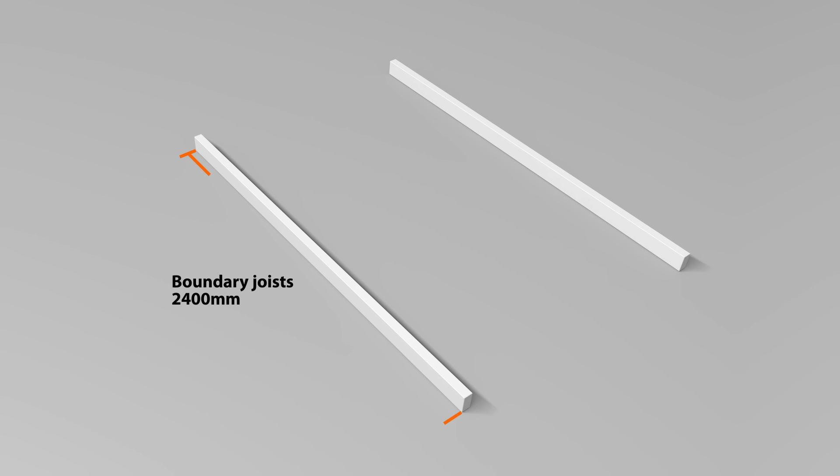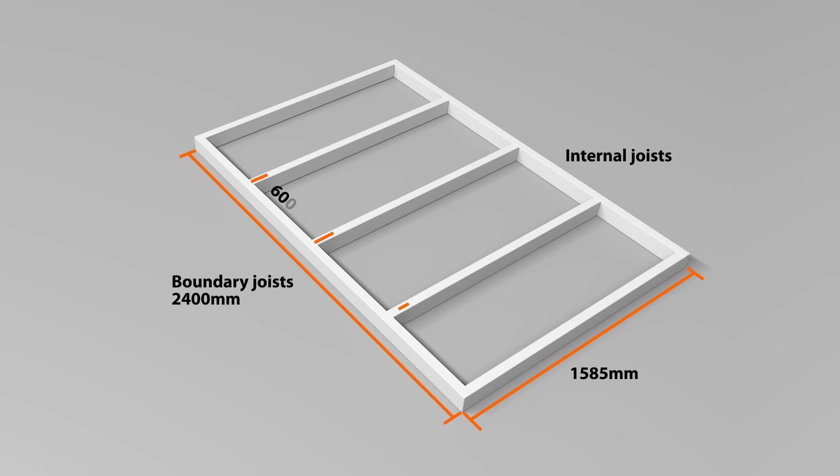I'll need 2 boundary joists at 2.4 metres and the overall width of my floor is 1585. Yours may be slightly different depending on the widths of your floorboards. My internal joist will sit between the boundary joists and I'll have 5 of them at 600mm centres. I'll start by cutting my boundary joist to length.

Okay, so I've just got my 2 outside rails clamped together. Now what I'm going to do is start marking these out for 600 centres for our joists to go in between. So we're going to go 600mm to the centre of our joists.

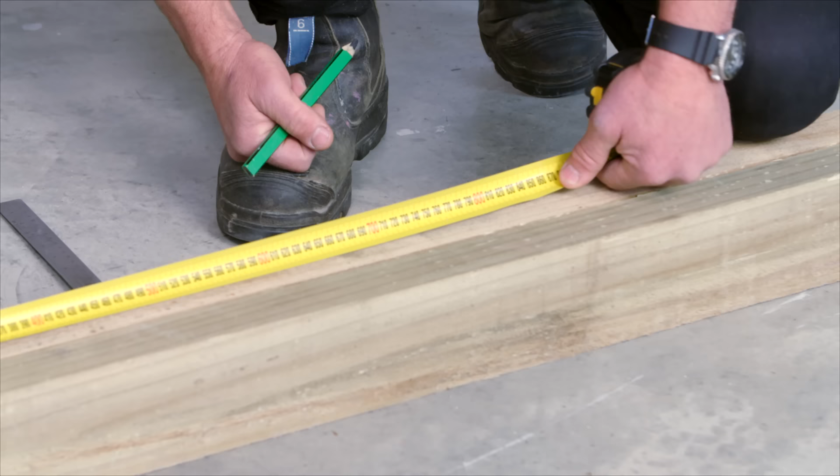So our joist is approximately 50mm wide, so I'm going to go 625 and then I'm going to put a cross on that side, which will indicate exactly where our joist is going to sit. Then just continue to mark out the remaining at 600mm centres.

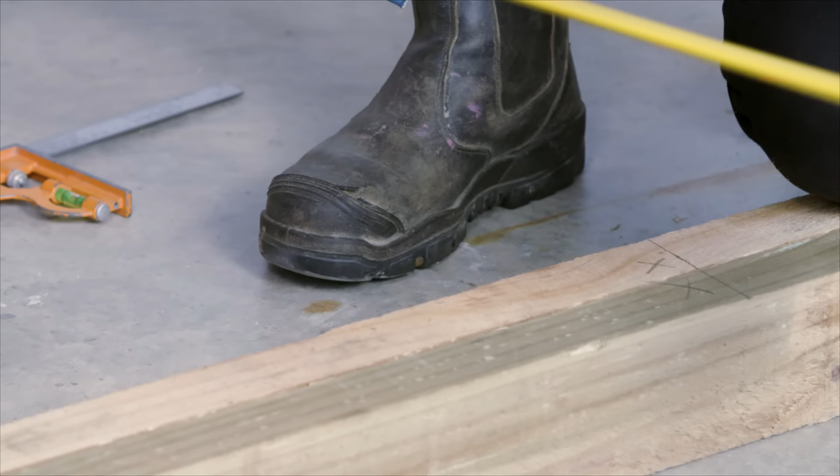Now, our overall width of our building is 1585mm wide, so just need to work out the actual length of our joists. So if we put our 1585 on the outside of our boundary joist there, that gives us a joist length of 1480. So I need to cut 5 joists at 1480.

Okay, all my joists are cut. Now I'm just going to start placing them in between on our marks. We'll just sit them in there nicely. Then I'll start by fixing the 2 outside joists in place.

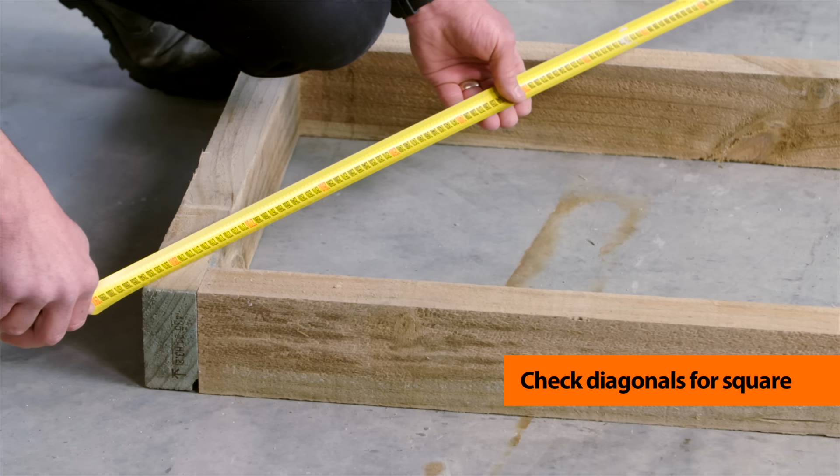I'm using 100mm bugle screws, but you could use galvanised framing nails if you like. Then measure your diagonals to make sure the frame is square. Both measurements should be the same, if not, adjust as needed.

Now what we can do is come back and screw in our last 3 joists. Then lie the frame on 100 by 100 bearers and position it at 200mm in from the outer edges and fix it to these bearers through the joists.

Okay, now it's time to start laying the flooring. So I'm just going to put our first board flush with our edges. Then fix them to the frame with 2 screws on either end, staggering the joins as you go.

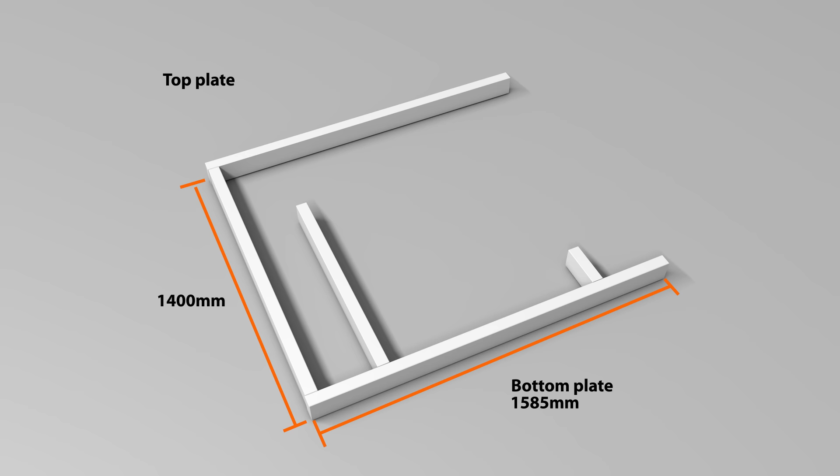And then we can move on to making our frames. For our back wall, we've got a top and bottom plate at 1585, an overall height of 1.4 metres and 4 studs at 1.3 metres. There's a window with a 900 by 350 opening, a jack stud at 645 and a 200mm long nog above.

Okay, I've just clamped my 2 top and bottom plates together and I've marked the centre, and so from that I'm going to come 450mm and then I'm going to measure the 900mm there, indicating the window space. And let's square those marks across. So we're just going to clearly indicate exactly where our studs go, same on this side here.

Then, just like we did for the floor, open these up and fix the studs in position. So I've just cut myself 2 windowsill plates to 900mm and I'm just going to mark out on our 2 studs here where they sit.

So my first measurement, 750mm, that will be to the top of our sill plate, and 1100 will be to the bottom of the top one. So we'll just do the same on that side. Position the plates on our marks and fix them in place. Then add our jack stud and nog.

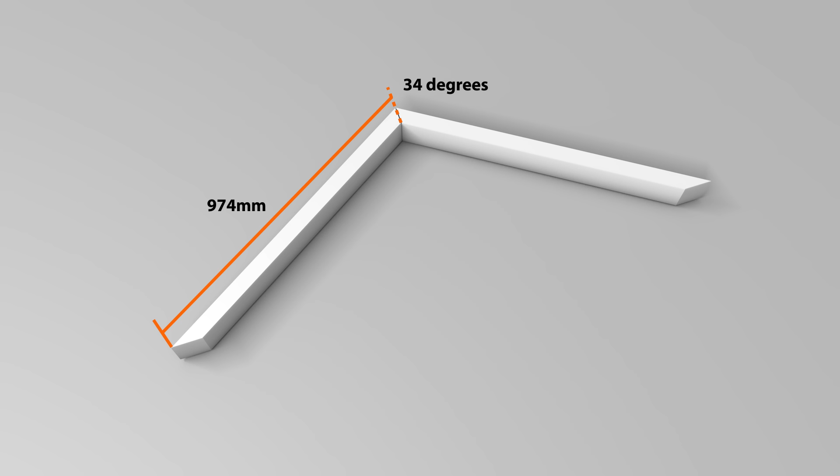The truss is made from 2 pieces of framing at 974mm long with a 34-degree mitre at the top and a 55-degree angle on the ends. Then we've got a truss brace made from 2 lengths at 405mm, 90 degrees on the top and also with a 34-degree angle on the ends.

I'll start by cutting the top pieces to length. What I'm going to do is move this around to 55 degrees, cut this angle first.

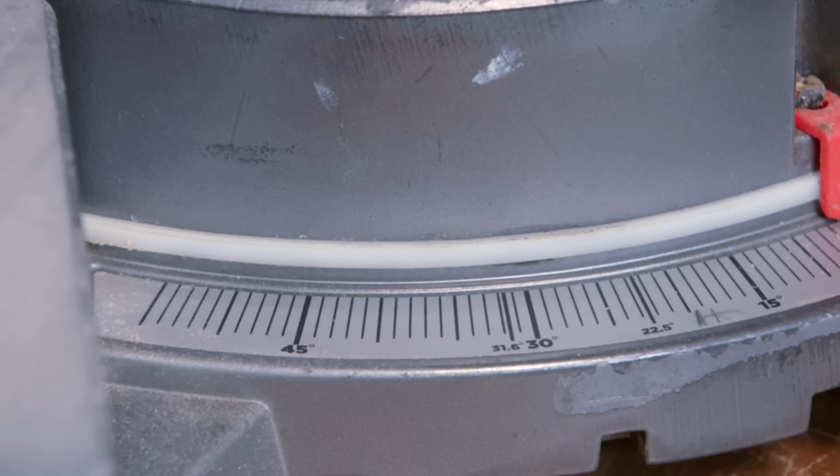Okay, now let's measure from our long point, 974mm. And I always put a mark as to the way I want the angle to go, just to remind myself. So we're going to now move our blade around to 34 degrees.

And I'll cut 2 lengths like this. I've allowed these to come 25mm past, and then I'll fix that on. I'll do the same on the other side. Then we'll just come to the middle and screw that off, and fix the 2 truss braces in the centre. And that's our back wall done.

Okay, I'm just about ready to start putting on my weatherboards. Now, just before I do that, what I've done is made myself up a story rod - a piece of timber with a whole lot of marks on it that indicates exactly where our weatherboards go on the house. I've marked 125mm increments on here. We've got a 150mm wide board, and I'm allowing a 25mm overlap. So if I get the story rod flush with our bottom plate, I can transfer these measurements to both sides of our frame, indicating the top of each weatherboard.

Now our first board at the moment is sitting flat, so all I'm going to do for now is just kick that out on an angle and screw it in as if there was another board underneath it. So sitting on my pencil marks, I'll fix it down on both ends. Then screw the next board on, but make sure you don't drive the screw through the board below, because we don't want the board splitting when it expands and contracts. Then just work your way up.

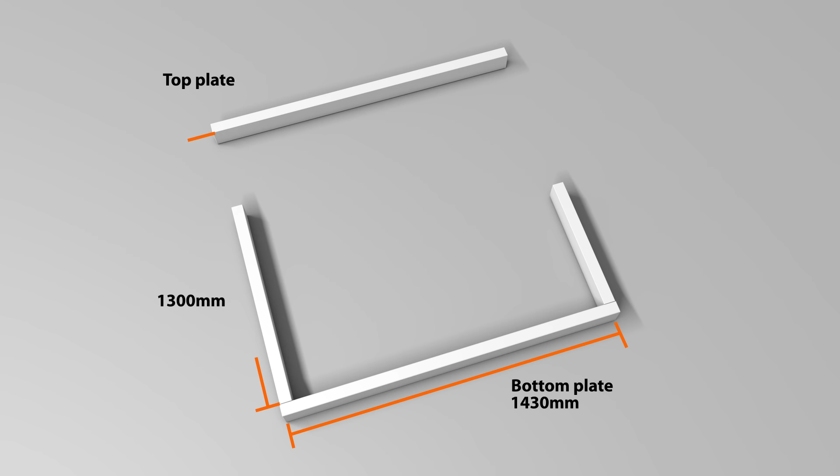Now for the right wall. This is super simple. No window, just a top and bottom plate at 1430mm long and 3 studs at 1.3 metres - one on either end and one in the centre.

Now the difference with these side walls is we're going to overhang the cladding 125mm, and the reason for that is because the thickness of all of that is 125 millimeters. So this is just going to slip over top of that on either side. So making sure I'm exactly 125, and we're just going to work our way up.

Right, that's our right wall clad. So we'll stand it up and fix it to the back wall and the floor.

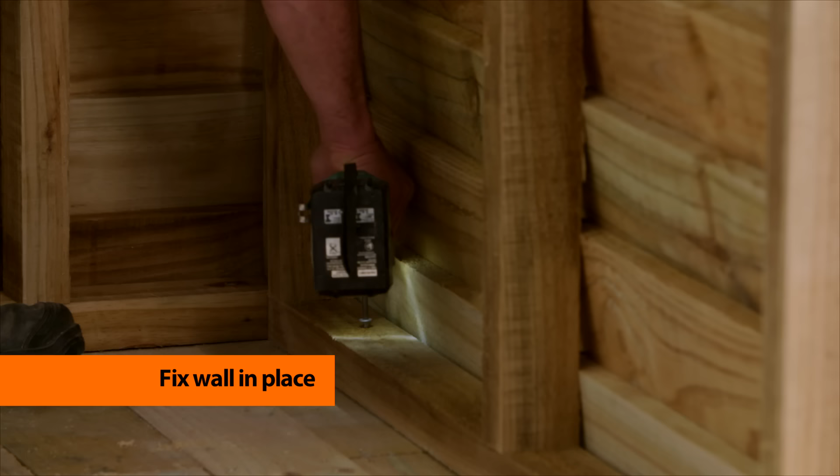Our left wall is similar to our back wall with a window in the centre. The top and bottom plates are the same length as the right wall at 1430mm, and we have 4 studs, a jack stud and a nog. When built, we'll fix it to the back wall and the floor.

And finally, our front wall frame, which has a door and a window. The top and bottom plates are 1585 long. There are 4 studs, one on either end, one at 245mm to the outer edge of the stud, and one at 930mm to the inner edge, making our door space. Our windowsill plates are 520mm long at the same height as the other 2 windows, and the truss is exactly the same as the truss on the back wall.

So put it all together and fix on your cladding. The first weatherboard on either side, I just ripped 25mm off the bottom of it because this sits on our decking here. And I've cut halfway through our bottom plate on either side. So once we lift this into place and we've screwed it all down, we'll then cut that doorway out.

And with my window here, I've just cut a couple of packers, 50mm wide, and I'm going to slide that in underneath that weatherboard to support it, sit that one on top, throw a couple of screws in there. All these are just packers for when we build our window frame, to support it. So I'll fix those in, and then it's time to put the wall in.

So we'll just slip that in, and I'm going to use my little cramp to hold that in place. Then fix the front wall to the side walls and the floor. The front wall's up, starting to look pretty good.

So time to make our mid truss, which is pretty simple. It's exactly the same length as our trusses on the front and back frames. We've got a bottom chord that I've cut here, 550mm long, on a 55-degree angle, so that'll sit under there quite nicely. We've got a length of 335mm from our short point to our long point, the same on both sides.

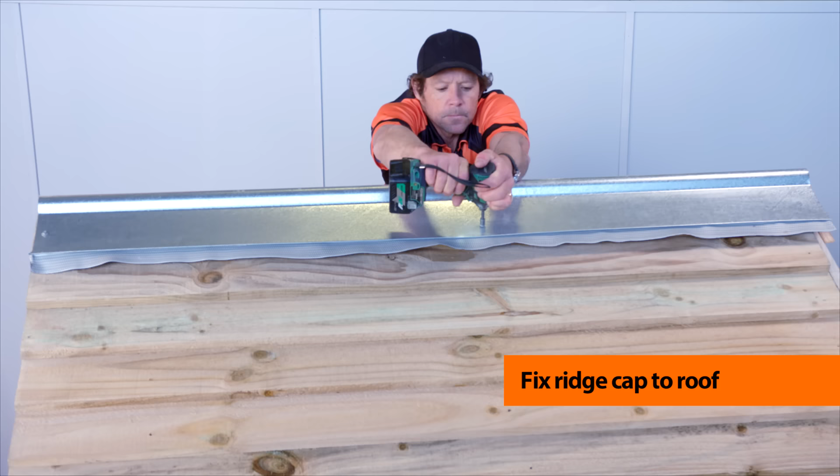Right, my playhouse is looking pretty sharp. Now, just to make it look even better, I'm going to put some fascia on the front here and a barge cap on the top.

So I've cut 2 pieces of this 4x1, 1090 from our long point to our short point at 34 degrees, and exactly the same for that, 1090 from our long point to our short point. Now obviously this one's cut on the flat and this one's cut on the edge. Just to give it a little bit of detail, I'm going to overhang this one the thickness of my pencil, because that's what I've got on hand, and make sure that's flush on the end. Using our 50mm screw we'll fix that about every 300mm.

Okay, so that's obviously my left-hand side. Now all I have to do is exactly the same with the angles going the other way for my right-hand side. Okay, so I've got my 2 pairs there. I'm just going to sit them, making sure I'm dead centre. Cramp them in position and fix them in place along the front and the sides.

Time to start making up our corner boxes, which go on all 4 corners. Now these are pretty simple to make, just like our fascia barge combo. The only difference really is that I'm keeping this flush on the edges as opposed to having that little overhang. Now, once again, we've got a 34-degree angle on there and a 34-degree angle on there.